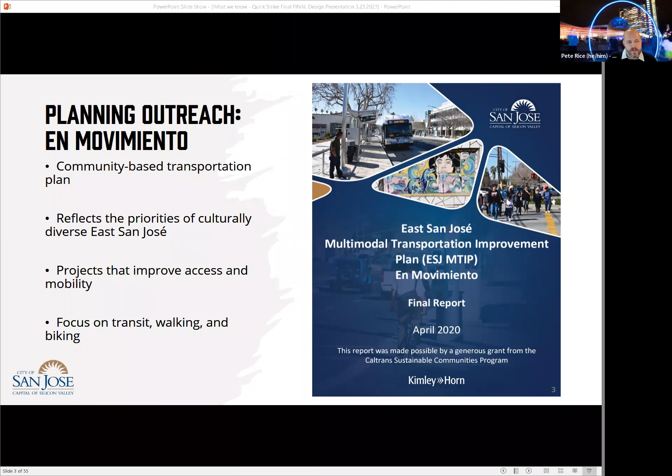Here are some key takeaways from Movimiento. We asked community members about challenges to walking, biking, and taking transit in East San Jose, and high vehicle speeds were the number one cited challenge. We also asked about potential treatments, and traffic calming and enhanced pedestrian crossings were among the most supported options. We asked about priorities for improving transportation, and safety and health were among the top community priorities. Finally, we heard quite a bit that implementation of projects was a priority - in other words, they wanted less talk and more action. We were politely asked to start delivering projects rather than just talking about them.

So that brings us to how we got here tonight. This project was made possible by a grant from the Metropolitan Transportation Commission, MTC - a program they call Quick Strike. We were awarded $1.4 million for design and construction of the 7 project corridors. The catch is these projects have to be ready to go relatively quickly. You can see the timeline here - it's actually a bit longer than initially planned because we received an extension, but originally we thought we had about a year to design these projects.

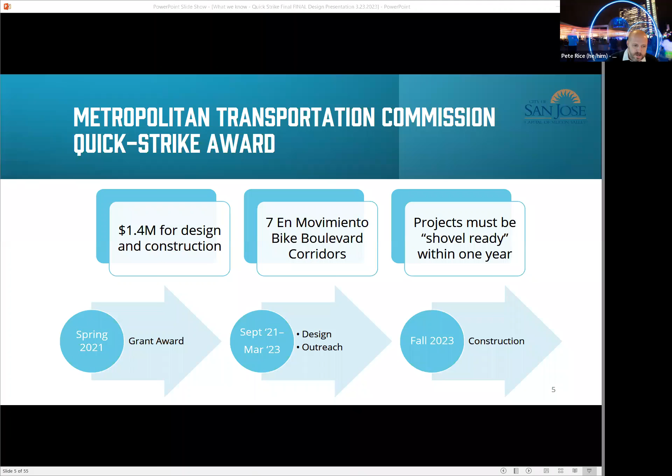These are the project goals we've stated from the beginning, and I think they align well with what we heard during Movimiento. We want to make these streets safer for all, especially our most vulnerable roadway users - people who walk and bike. We want people to slow down, and we want to create a network so people can access the great places we have on the east side.

For those of you new to the project, I'm seeing some unfamiliar names, which is great. These corridors in green are the project corridors, and except for 21st Street, they're all bike boulevards or shared streets, meaning bikes and cars share the same travel lane.

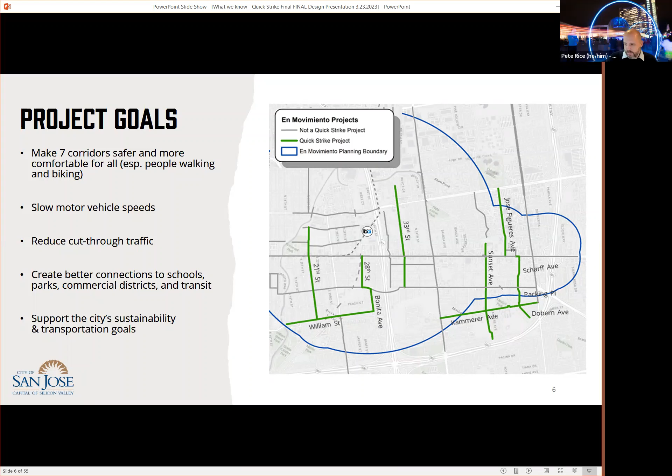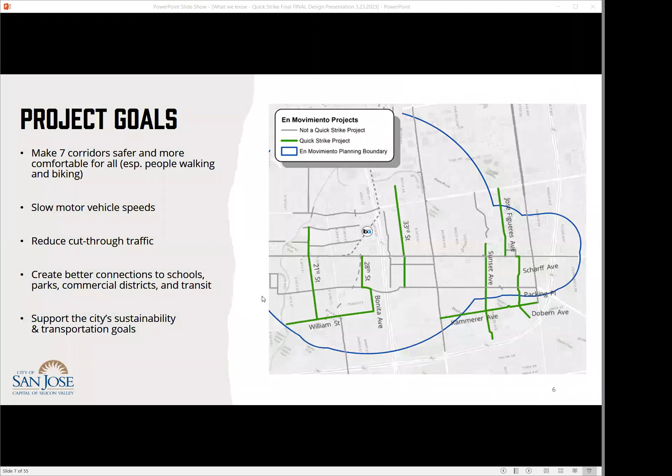Okay, so then my follow-up question is, and Pete, you know that I live on 33rd Street, was the survey conducted in particular between McKee and Alum Rock? Because as I shared with you, we have a stop sign, and through COVID and even today, I work in my den very front, I can hear cars rev up their engine just to speed down the road. So was the average taken just between Alum Rock and McKee, or was it the entire 33rd Street, which I would imagine would have a different outcome?

So it's not an average of, let's see, how can I explain this. It takes cars going over the tubes, that's where it measures them. You do it at the mid-block, so you get the speed of each car, and then you use that to create a range. So was the tube placed in one location, or was it placed in several?

So it was placed, so 33rd Street south of St. John and 33rd Street north of San Fernando, so farther south. Okay, I don't know St. John or San Fernando, so I'm at a loss. That's where I'm not quite clear.

Was one placed in between McKee and Alum Rock? Yeah, St. John is right to the north of Alum Rock, so this would be between Alum Rock and St. John, I believe. Okay, if you could just, it would be nice to get that confirmation, since we've had some conversations, and this survey you were going to have redone, I thought, so it would be nice to have that data. Okay, thanks. Sure.

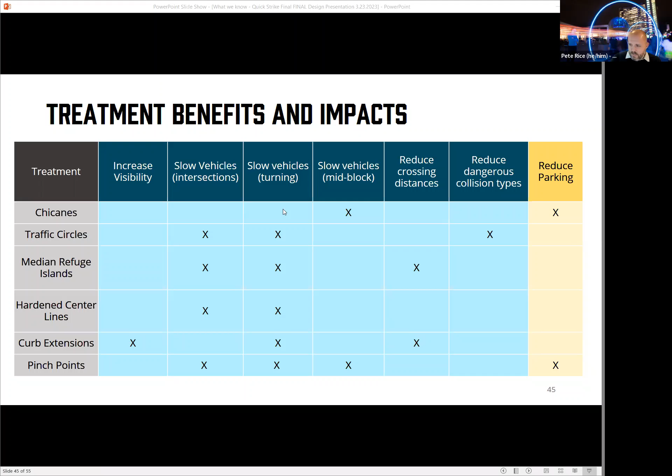There are some trade-offs. Chicanes and pinch points may reduce parking, and I know for some of you that's a concern. Speaking of the parking impacts, we did a parking audit for the corridors where we are removing more than a few spots. If we're removing just one or two, then we didn't. But for these corridors, we did do a parking audit. We want to get a better idea of the impact that removing parking would have.

Kammerer here, this last block of Kammerer, there's no parking now, and there will still be no parking afterwards. Same with William Court, there's only one spot now, and there's not going to be any spots afterwards. So ultimately, the parking audit did not change the design of any of the projects. As a DOT and the city, safety is our number one priority, and the treatments we have included here, we feel are the best way to address the safety issue.

So I'm sure some of you are wondering about speed humps. Most people know about them, they're a common traffic calming treatment. Our engineers looked at speed humps, and we came to the conclusion that they are not the right treatment for corridors like 33rd and William Court, where you have a long straightaway with parking on just one side. Also, given the quick turnaround time of the grant and the long process required to locate the speed humps, it meant they weren't a good match for this project.

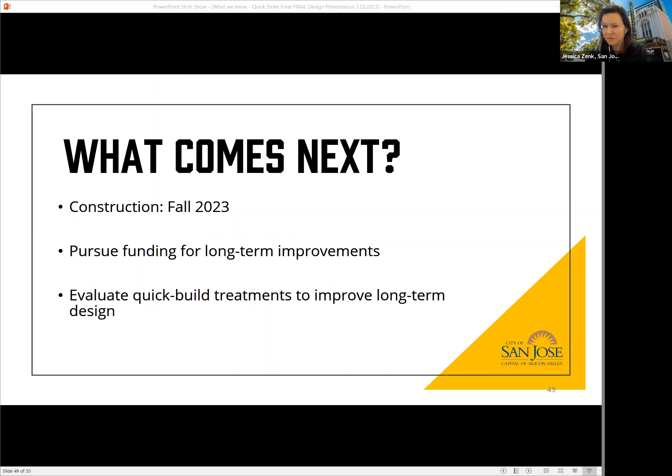Colin, you were doing a great job scribing. Anything else in terms of follow-up that you captured? Following up on where the speed tube locations were and the exact dates when those were pulled, I know that we pulled them twice. One for sure was early 2022, but as you all might have felt, the years have just blended together somehow, it's 3 years in the pandemic, so I can get the exact dates to you, Darlene, about when those were pulled and how long they were there for.

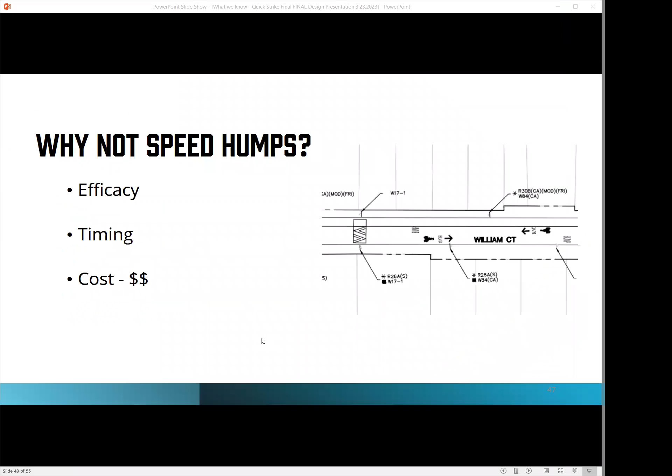Darlene also asked about the car count on 33rd Street. Were you referring to the chart that Pete had up earlier, the table with all the counts? No, I'm tagging into the conversation from the gentleman, he was questioning the car count for his street.

I'm just going to have fun with you guys since we're having this conversation. I've lived on the street for 4 years and there are others who've lived here far longer. I'm going to actually do some counts, walk down the street and grab some data points, because I think we who live on this street can add value to the data and give more perspective. So yes, I'm talking about that data, how the car count was done, whether driveways were included. I would like to understand that in more detail.

Great, well, I think that's something we can do, is get more details about exactly how and when the car counts were done.

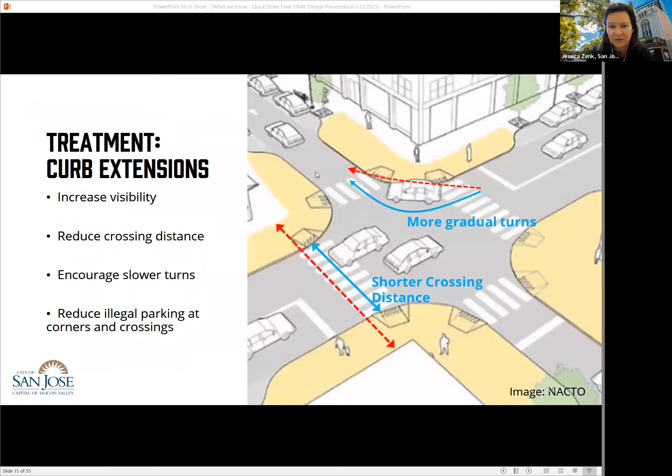Can I just... I'm sorry to talk over you, Colin. When we say car counts, are we referring to the traffic numbers on this screen, or to the parking car counts? Just to make sure - parking, actually.

The particular conversation was the parking slide in particular. And of course, the 29 miles per hour - I absolutely question that in this segment of the street. If it was taken in 2022, that's still COVID time, or even 2020. We do have seasonal workers that live on this street, and it's heavier in the summertime, so that's another data point. I'm just sharing thoughts that I don't think this provides the full picture.

Darlene, what part between Alum Rock and McKee on 33rd do you think is the fastest? Between Alum Rock and McKee, right after the stop sign, if you make a right or left, depending, coming from McKee, that little section there, the cars aren't that fast. But once they hit that stop sign, they see the thoroughfare, and that's where they do their drag racing - all the way to Alum Rock. So McKee to Alum Rock from that stop sign.

And by the way, that little machine you had near that stop sign that gave the miles per hour - it's kind of silly to put it where you put it, right by a stop sign. We put them south of the intersections. That's why it was kind of hard to understand the locations, because it says south of St. John. They're always placed mid-block to avoid those issues.

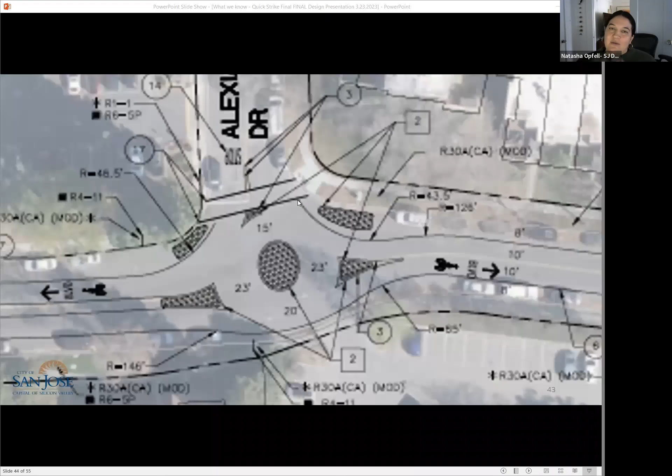Also, the calculations are done as the 85th percentile speeds. So 85 people or less, if you took 100, are going 29 or under. It does not account for those - I'm speaking from my street - middle of the night drag racers, the one-offs that are just hauling down the road. We have that data as part of these calculations, but they're technically outliers, dangerous outliers. Those are the worst, and that will not occur if speed bumps are installed. The drag racing won't occur.

I know we're going to have more conversations. Jessica, just so I can stop talking, because I want to give other people an opportunity - I'll hear from you later this week, or no later than when? We can start the email chain tonight before the meeting is over.